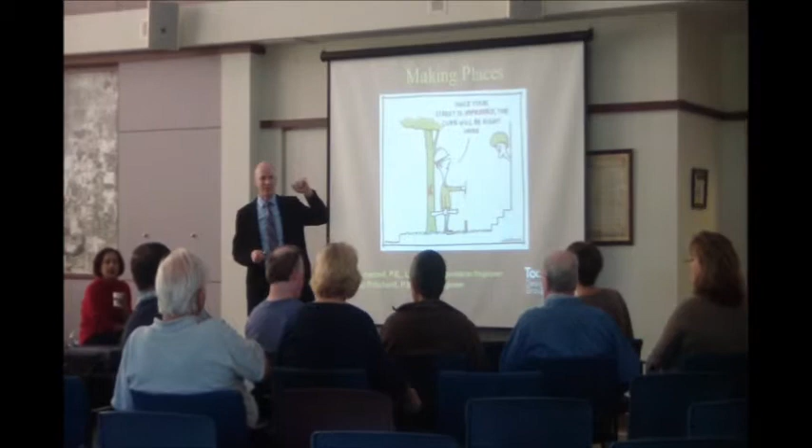I guess everyone can see better today, right? Okay, well for those who haven't been here already... so a couple of folks are new. Who's new? Who's been part of the process?

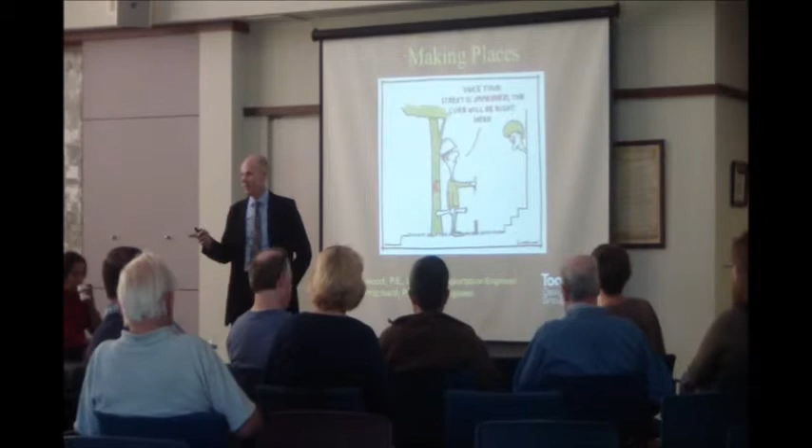Okay, so it might be a couple of people. I'm Ian Lockwood with Toole Design Group, and Anna and I have been working over the last couple of days on your area, and today we're going to share with you what we came up with. But I want to start by thanking Andy and Candace for setting this up and making us comfortable and challenging us to meet with folks and listen.

And for all of you who have come out to all the meetings, thank you very much. It's really hard to draw anything unless you know what people are thinking, what their values are, and what's concerning them. So I hope that we've captured some of what you told us in these drawings.

Just keep in mind that these are just ideas to start with, based on urban design principles. We are not familiar with the codes and the rules and all the other things that need to be taken into account. We're also not familiar with where all the property lines are, so we may be stepping on the odd toe here and there. That was unintentional. But what I'm hoping is just to share with you some vocabulary and approach so that you can take these ideas and keep moving forwards with them.

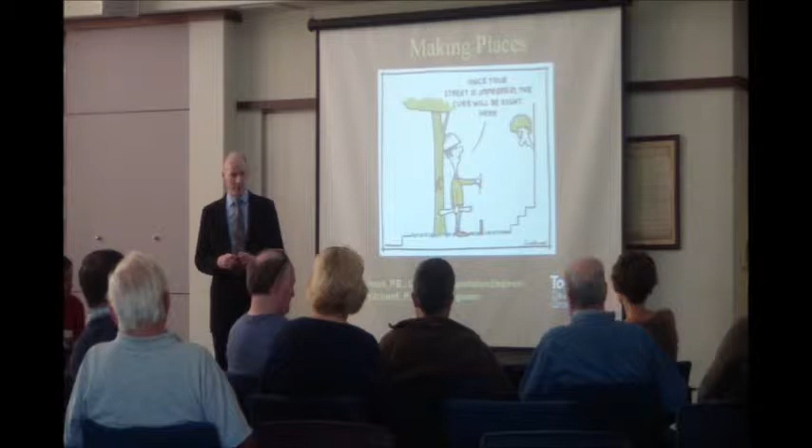When we got here, there was a lot of conflict and distrust and so on, and I hope this is a kind of healing process a little bit, where if we can get behind some ideas together, we can actually get something done. I can't remember how many times we talked about it over the last few days, about helping shape the planning, because then you get your vision reflected in the future, as opposed to not getting involved, where things happen and you need to keep having to fight what's going on.

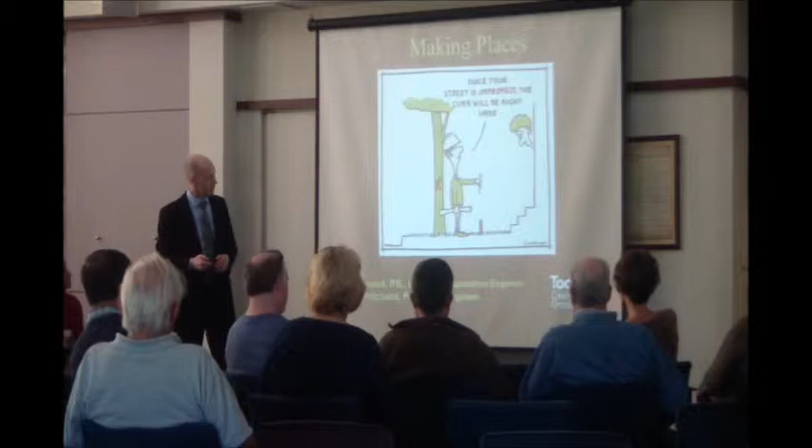So it's always nice to support rather than to react to something. And the other thing, when we met, a whole bunch of issues came up, and I explained some of the theories to a few of you. So we kept a record of all of those discussions, and we took the key ones and we're going to summarize them as well.

So it's a bit of stuff at the beginning, so that when we get to the ideas about the actual context, it makes sense.

Oh, this is the process. So we had a tour. We looked at your streets, some of your neighborhoods. We visited your roundabout. Awful lot of signs — just noticed that now.

Yeah, that's right. There's people who want to walk, or we saw some cyclists. There's plenty of development coming, so there's a lot of pressure on the area, so now it's a good time to get ahead of that.

We had lots and lots of meetings. There was no shortage of input, and we went late into the night talking to people. So we rolled out the trace paper, we drew stuff, and finally someone had to make a decision. So whatever the baby drew on, that's what we chose.

So basically, it's what we heard. Folks are very concerned about adjacencies — that is, what's compatible with their homes and so forth. The scale — they're most concerned about the scale. Green space is very important to folks. A lot of people said we want places to walk, we enjoy walking, we want to be able to walk. So we're going to talk a little bit about walkability.

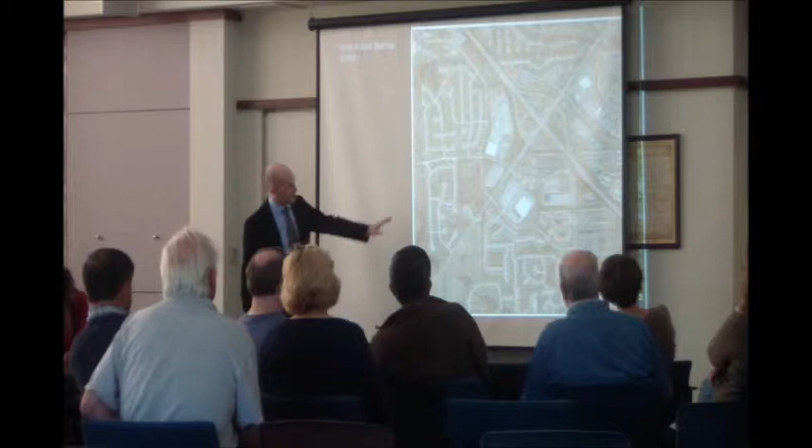Another set of first generation development with a few greenfields still left to fill in. So again, a very sparse network, and we're going to focus a lot on this particular network because it's probably the more challenging of the two.

And just for scale, since we talked about connectivity, we tried to pick a place you might be familiar with. This is Plymouth, and it shows the connected network, so you can contrast it with here - of course completely different context, but it shows you what a connected network looks like compared to a sparse network.

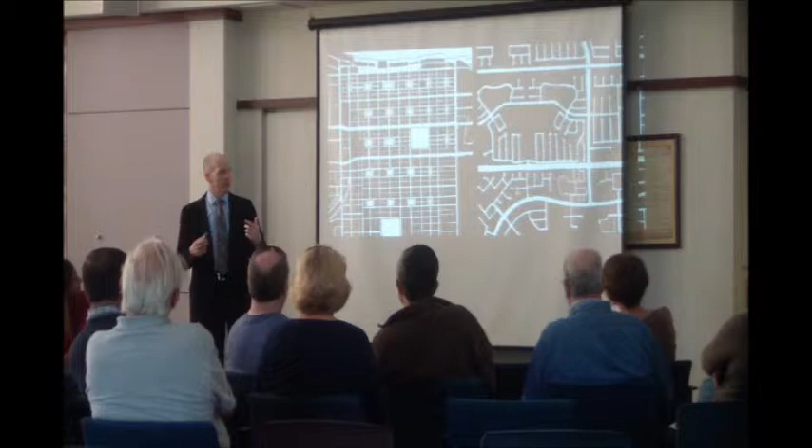Even the one on the left - those white squares and rectangles are parks, correct? Yeah, these are squares and parks, so you're always within a fairly close proximity of a park or a place to meet. That's something you expressed, and you'll see this reflected in what we drew. This is Savannah - it's very famous for its squares.

And then we talked about the scale of streets, having many streets do the lifting as opposed to putting all the load on just a couple of streets. It's a lot easier to cross several little streets than one big street, which creates a barrier.

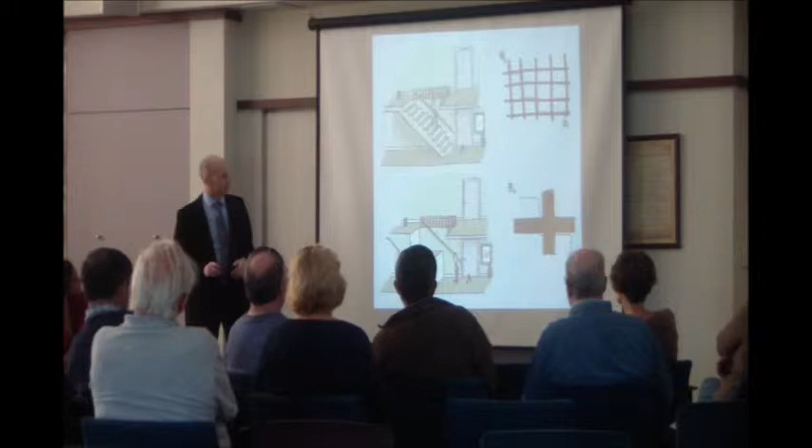We also talked about how street networks inform land uses, the scale of land uses. When the blocks are huge, you tend to get big block, big scale type development, and as they get smaller, you get more human scale development, which is, I think, in keeping with your vision for the future.

As you assign trips to the network, when all the trips have to use one road, it tends to default to be automobile oriented. With more routing options, you can go multiple ways, spreading the loads out. These networks also tend to be conducive to walking, so you actually have some choices - if something's within walking distance, you can walk there.

This is a little rule of thumb a number of us talked about: having like facing like. Single-family homes should face single-family homes across the street, townhomes should face townhomes, and retail should face retail. It makes a nice street when things match on both sides. The exception is open space - anything can face a square or a park.

We always like to have a street between the private uses and the public open space because it keeps it public. There's sometimes an issue with a one-sided retail street - retail streets tend to do well with both sides. But basically any land use can face open space.

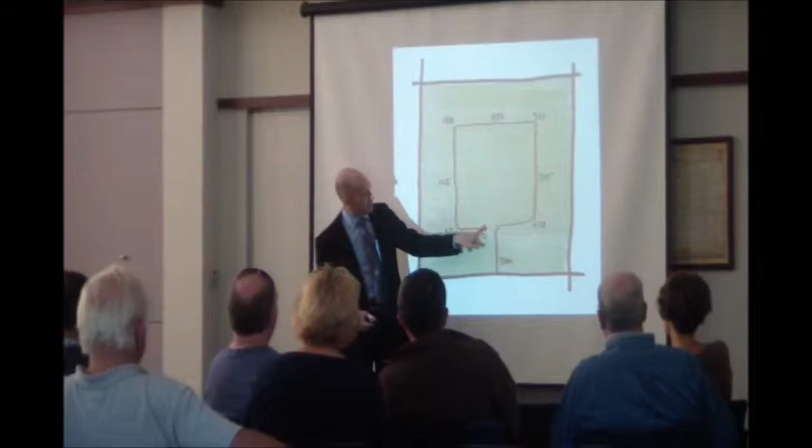So what would happen if we just connected the cul-de-sac to this entrance here? Well, now there's like a kind of continental divide, so the traffic splits that way. The average has gone from 250 trips on that street to 125 - the actual traffic volumes have been cut in half because of this connection. Now, if we made another connection, traffic volumes are a quarter of what they were. Same number of trips, same number of houses, but a quarter of the traffic.

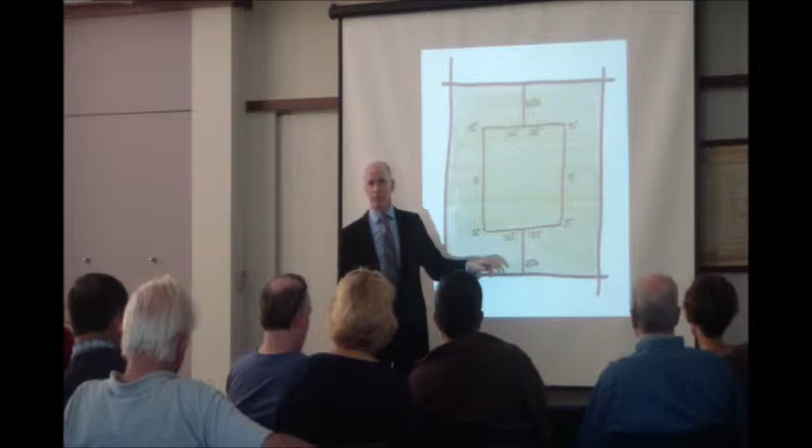So if you have a kid and your child wants to visit their friend, you're much more likely to let them walk with a quarter of the traffic than before. It's a much more friendly environment for walking. And if you connect it again, now you have 1/8 of the traffic, and eventually you get down to a network where there's not a lot of traffic because it's all being shared by all these streets. There's still 500 trips and still 500 homes, but the sharing of the loads makes it very walkable. So it's no coincidence that some of the most walkable places in the United States have the most little streets.

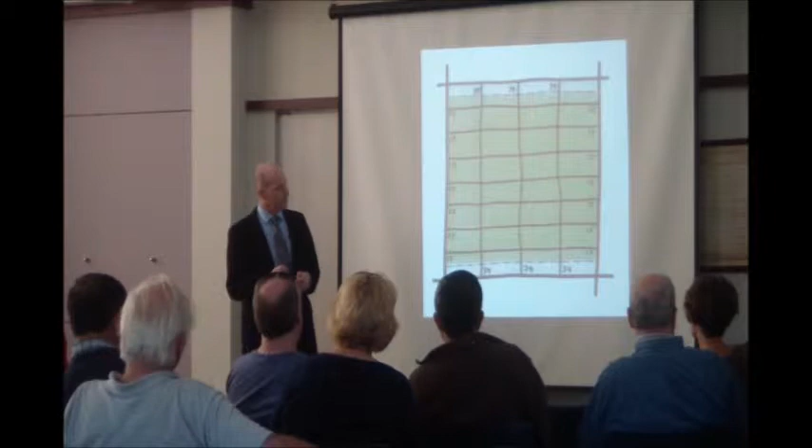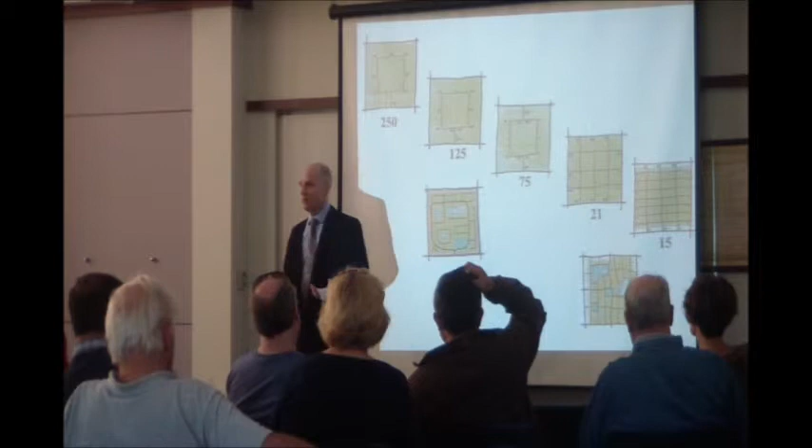But nobody actually builds it like this. There's kind of hybrids. Your place is unique and it's got constraints and so forth. We strive for connectivity, but we have to respect the context we're given. So that's kind of the motivation.

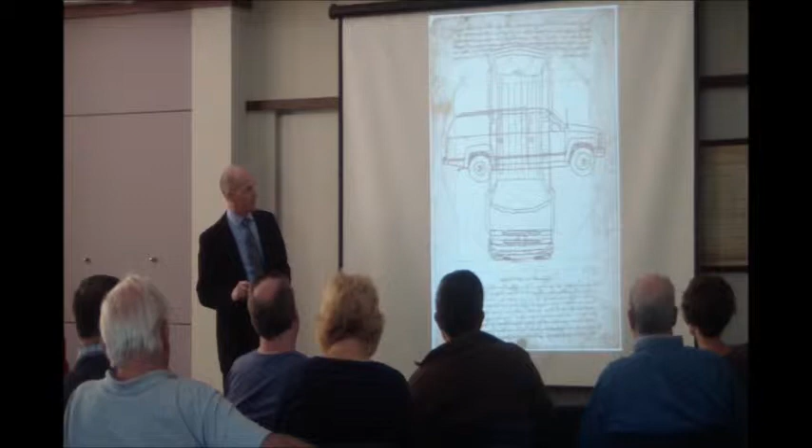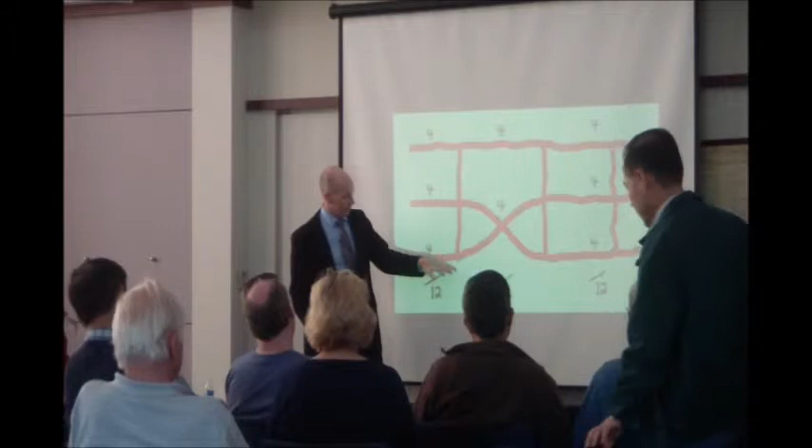And all the streets are four lanes, and the city thought they had 12 lanes east-west. But here is a traffic signal, and only one of the streets can have a green light at a time. So effectively, they only really have 8 lanes. And of course, there's all kinds of traffic problems here.

We were called in to referee which of the two streets had to be widened to alleviate the traffic problems. Everyone on this street wanted this street widened, and everyone on that street wanted that street widened. And they've been fighting for like 15 years.

There was a mall here with a parking lot and a couple of businesses with some parking at the back. So within half an hour, we just suggested, well, why don't you connect through there? And now you've got your 12 lanes, and you could feel the air leave the room. Like, we've been fighting for 15 years, we could have just done that. There's lots of ways to get back and forth between the two streets. They didn't have to crisscross here.

The property had to be bought, but compared to buying all the property to make an 8-lane road—all the backyards, all the businesses, all the parking—it was a bargain. So from a property acquisition perspective, we're really far ahead. The thing is, they didn't need 12 lanes, so we put the parking back on, and it's only 10 lanes. So the cool part is that the car carrying capacity went from 8 to 10, a 25% increase, and we narrowed 2 out of the 3 streets.

So when you find a confluence, if you can remove it, you get a lot more bang for your buck, because confluences force you to build roads that are way too wide, unnecessarily wide, just because you make all the traffic meet at these intersections when they don't have to. So these come in all kinds of disguises.

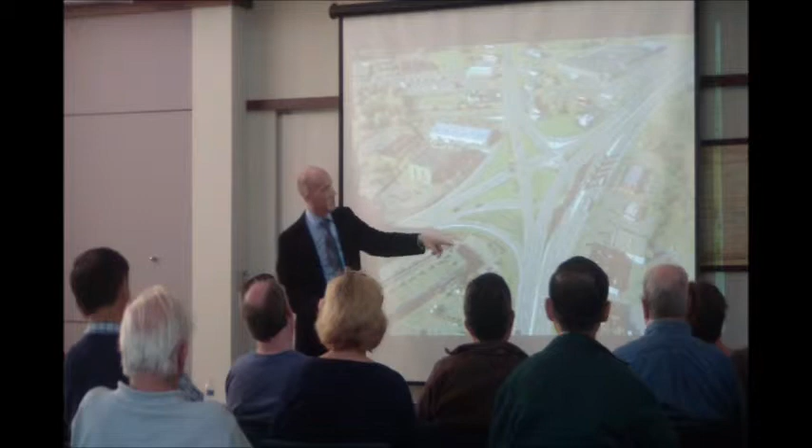Another engineering firm took a look at it, and they were going to build this big flyover. This is what we call solving in place. If you don't address the confluences, you have to handle all this traffic in the one spot, but when it gets to be too much, you have to create separate lanes, or widen, or something else. So this was going to damage half the economy of the town.

So with our solution of using a network, we can actually turn this into a contributing place and a square. And so that became the plan. It also saved millions and millions and millions of dollars that they didn't have to spend on flyovers and so forth—those are very expensive to build. It saved a ton of taxpayer money, actually benefited the town's businesses, still handled the car loads, and created a walkable place. So there's just no downside for this particular community.

And it even worked better for the cars, because this had to be signalized here—this even processed the cars better than the flyover.

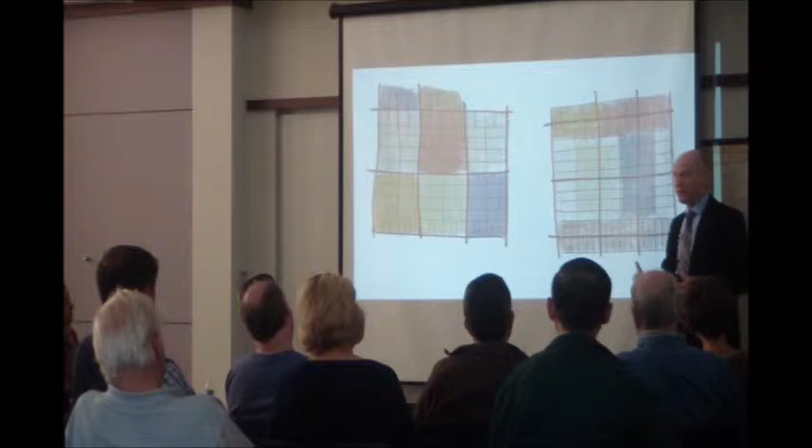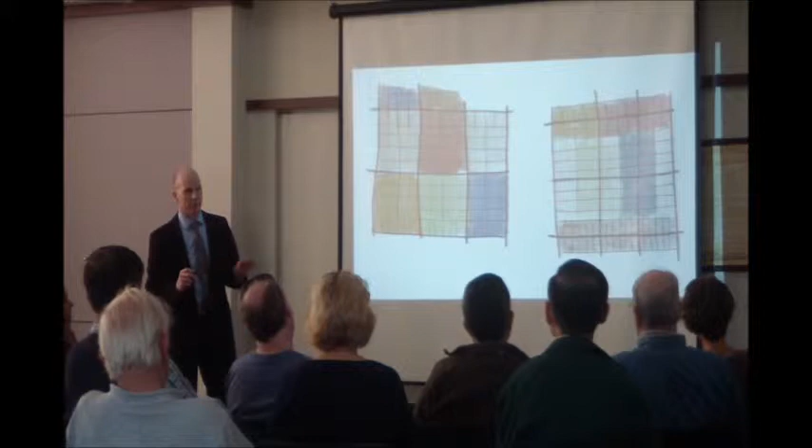Just a little bit—I'm not a planner, but just about the way you think about your land use. Sometimes zoning is done and the streets are at the edges of the zoning, so this zoning is different than that zoning. That's fine, but when you start thinking about your town center, think about what happens on both sides of the streets. Remember we talked about like facing like? So think about how you handle your land use so things are compatible across the street—these things can be incompatible. Just think about that a little bit. I'm no expert on zoning, but that's the kind of thing you want in your town center.

This is a very important concept for suburban areas that are getting infill, and that's exactly what you have going on. So this is an arbitrary street network, and you see these reddish lines—those are what we call A frontages. So that's an A frontage street, and every second street is one of these A streets, and every other street is a B street.

What we try to do is organize the buildings—and since you're already doing form-based code, this is already in your toolbox—is organize the fronts on the A streets so the doors and windows face there, creating a network of highly walkable streets where walking along is an engaging experience with the buildings.

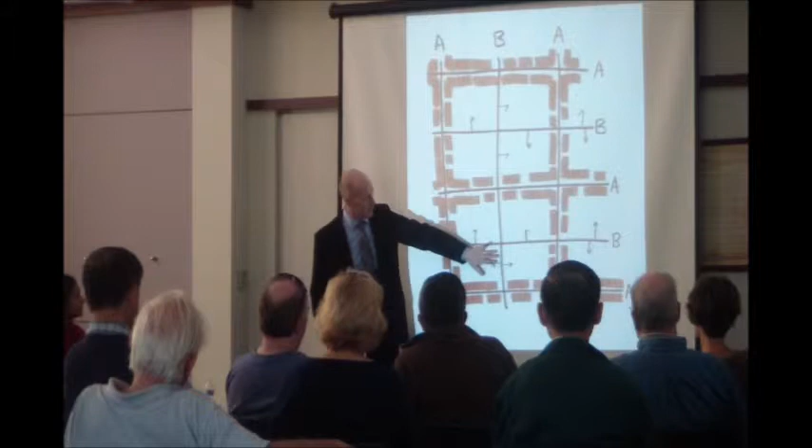All the servicing and parking come off the B streets. That doesn't mean there are no buildings on B streets, it just means your walk will be interrupted by driveways and so forth. So over time, as your town center fills in, if it's organized, it becomes increasingly walkable with every new building that goes in.

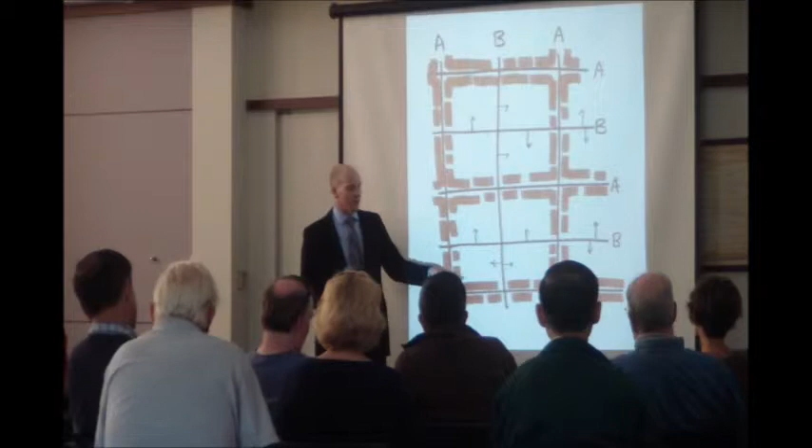If you don't do something like this, someone will build a building and their neighbor will build something backwards, so you'll be walking along the street passing a dumpster in a parking lot, then another building. This system gives predictability, so people can invest in your community and build a nice building knowing their neighbor will build a nice building with the front door in the right place.

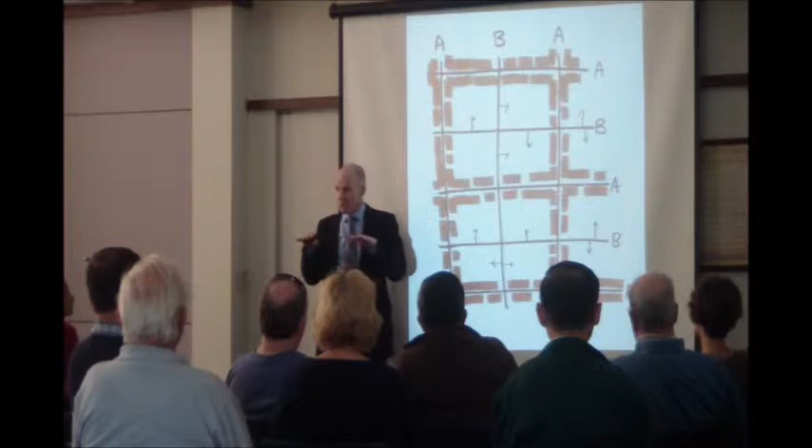So it's usually a good idea to organize your developing area along these A and B lines. There's just no money to line every block with A frontage, even in a dense downtown city, but particularly not in a lower density town center like you'd envision here.

So just a quick recap on walkability. There are three ingredients every walkable environment needs, whether it's a park or a city. People have to be comfortable walking, feeling at ease with their environment—this talks about scale, natural surveillance, feeling like you're not alone, that kind of thing.

Engaging—does it sustain your interest as you walk? We heard from a lot of people that they want to walk more, and if we can make the place engaging through A and B streets and that kind of thing, you'll be able to walk further and enjoy it more. Accessible—can you actually physically use it? This applies to anything, whether it's a park, a downtown, or a village.

But in centers, there are two more things needed. You want a convenient environment with a mix of land uses, so there are things you can actually walk to. If there's nothing to go to, you're not going to walk—so you want parks, groceries, a theater, or whatever might be in your town center.

And then connected—this is what we're spending a lot of time on—the street network, how does it all connect together? So with those five ingredients, you can actually get a very highly walkable place. The magic is how you apply those to your context. So let's get into that.

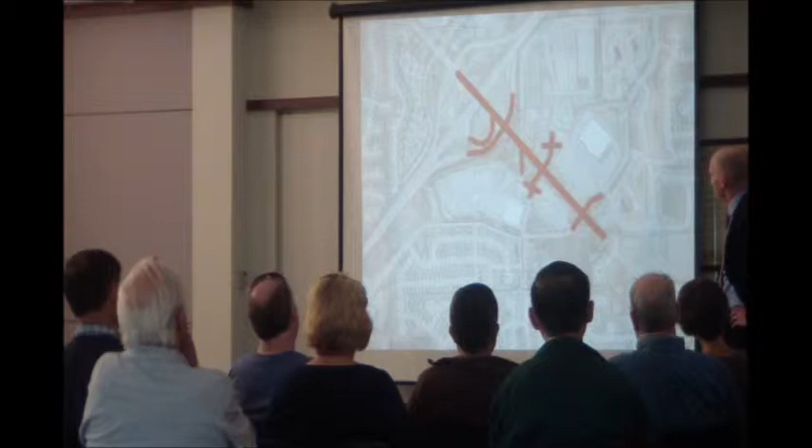Now, I haven't actually seen this presentation yet because we just put it together, so I'm hoping the next slide is of this area. Pretend for a second—this is one of those crisscrosses. That one has development on all sides; this one doesn't, so we have a little more flexibility here.

So let's pretend you could take a pair of scissors, cut those two streets, and pull them apart so they're not crisscrossing—so that if you're coming down this street you use one of the streets, and maybe if you're coming up here you use the other one. So you have two intersections processing what now one processes, making it a lot easier to get around.

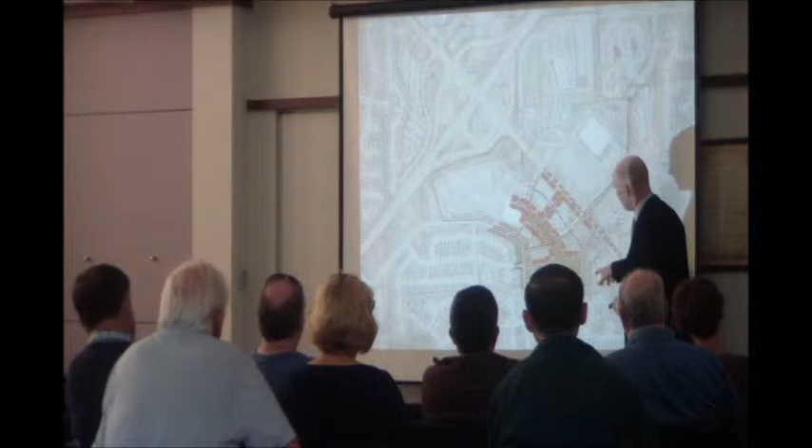Oh good, so there it is—so that undoes one confluence. Now there's a whole lot going on in this drawing. Let's start with the south, because this is what a lot of the energy in the room was about the last couple of days—the adjacency with these homes.

So what we have here is a liner of similarly scaled homes, about the same height. Just put street names on a few of the streets. They're narrower, so we can get more homes in, and in this idea they're 2 stories, denser, but a little further back, so the backyard's a little bigger.

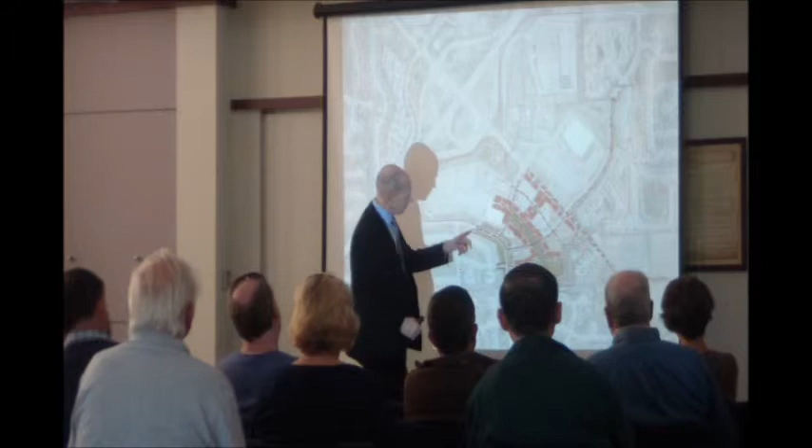That creates a nice buffer to everything around it. On this side, the characteristic of this area is there's a set of berms that come down, and then there's a wetland kind of thing. There's a stream, so we thought we'd look at the stream, and it goes up like that, creating a little linear park with a large park at the bottom.

Whenever you have a park, we consider that an A space, and we always like to frame it with buildings. So we frame the north or east side of the park with these buildings, and then along up towards the target. These are what we call A streets.

And then this would be a B street, so if you had to access parking, that's where you access it from. We made a little connection to the neighborhood where the wetland goes through. You can walk up into the park, then go up one of these B streets, and you're not walking past parking lots. You can get up to the target.

There's already an effort to create a connection between the grocery store and over here, so that in our minds made a good place for another A street. You can imagine buildings lining here over time, and this is already happening - there's buildings starting to frame the arterial right here.

And then, for your house right here, we didn't monkey with your house, but we put in this little small driveway so you can connect and turn left.

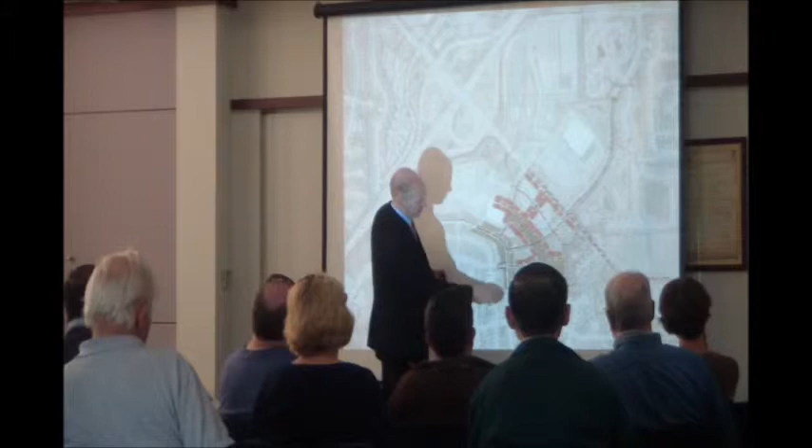The other thing that's here is down on, I think it's called Maple. It goes someplace and there's a big right of way, so we're thinking of some kind of trail, some sort of bike trail that could come up, go along the berm up here, which actually goes someplace, and it could come into the park system, and perhaps down here too, serving the neighborhood. So you have a connected bike system that connects the region to your neighborhoods and to your center.

So that might be a layer of convenience you could provide for cycling. These sorts of facilities are appealing to a pretty good population of cyclists. Most cyclists in the United States have to be survivors, since someone could be on the street, but this is actually comfortable for kids and so on, going to school or ice cream stores or what have you.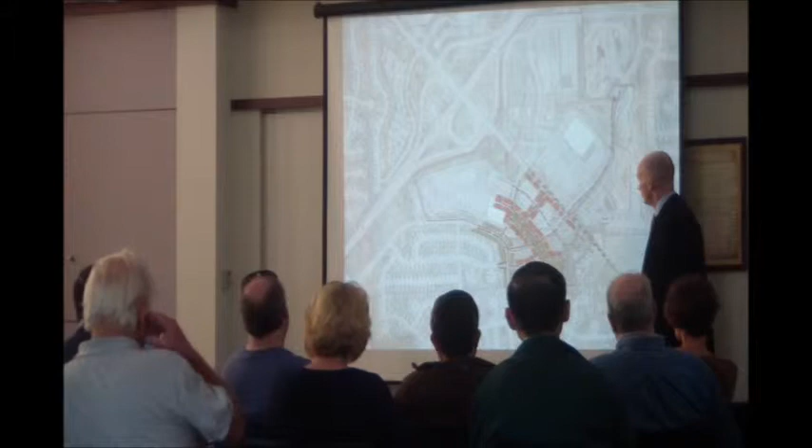So can I ask a question? Because I understood that in order to have a road off of the NRC road from the road commission, it would have to cut through my property. Are you saying that one property doesn't need to go over? Yeah, they're probably talking about if you wanted a signal or a left turn, if we're right in, right out kind of thing.

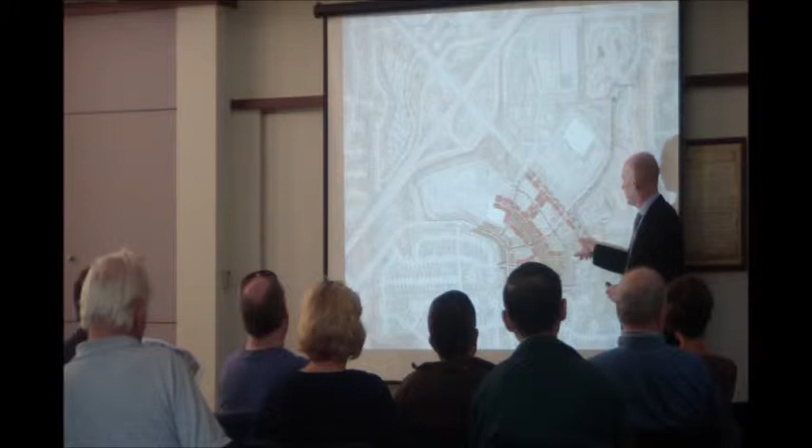It's just like your driveway, but it gives you access to this one. I don't know if you have $500,000 to spend on a traffic signal, but this kind of thing I think makes more sense for this context to provide access to a signal.

Right, I was just focused on the corner - yeah, there isn't, if you wanted a big intersection. But you're saying it's a small road, a driveway, that would be fine.

Yeah, they're right about that, and we'll get into it, but you can see that where the signals are going, there's a regular spacing, and to get that same spacing would be right here in your property. So if we wanted to go with the corner, would there just be another red box on the other side of the road? Yeah, you would just extend it.

This sketch will be posted on the township website, is that correct? The presentation will be, and will you give us a copy of this? Yeah, we'll give you all the JPEGs, all the files, and the PowerPoint, so you'll have access to all of them. So it'll be both posted independently as well as part of the presentation.

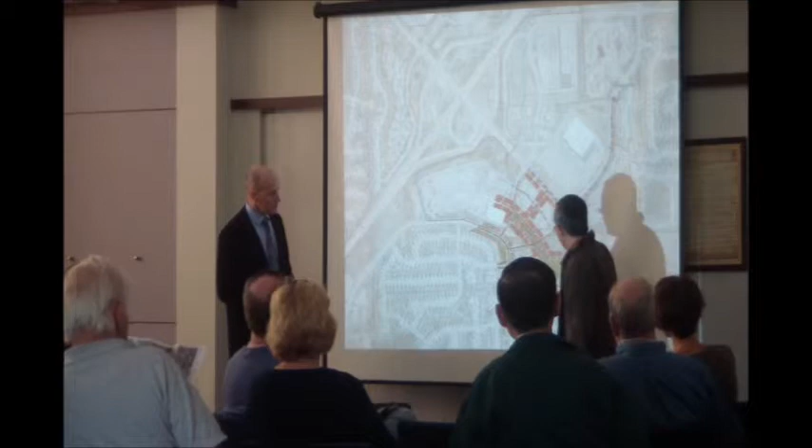How does the water flow? Because if you put property up, the water actually flows. This is the wetland, the water actually flows this way. Yeah.

I tried to get the alignment based on the aerial. I might have got it off, but you could pretend this is over further. This is just a concept. In fact, I probably made lots of mistakes like that. But we did the best we could in a short time with aerials, and we didn't have time to go out and actually survey where the water went. But wherever it does go, you either move this, or alter the flow, or some combination.

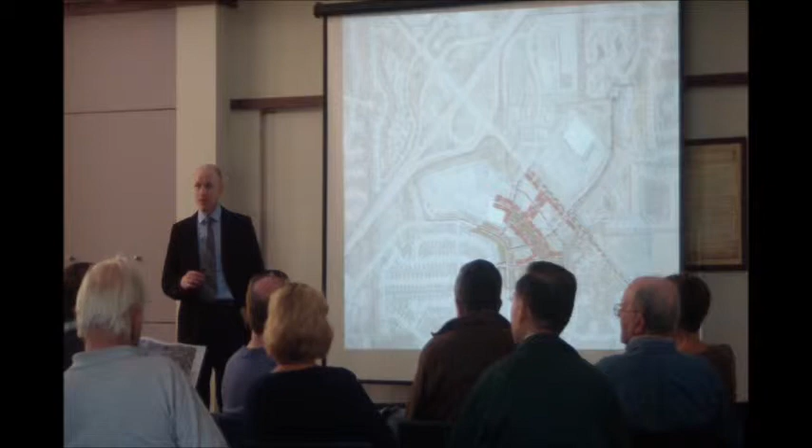Okay, let me just- let's finish the presentation, I appreciate the concept, and let's finish, because I know you have more.

I probably, if I were developing this, I wouldn't duplicate your homes, but I would duplicate them in height. But I think to make it pencil out financially, there might be more homes, not more in size. Yeah, there'll be skinnier, maybe a little deeper. But it would be low cost houses or about...

Yeah, I'm not the market guy. Anybody's gonna move in here though, I don't think, I think this property's probably too expensive for a lot of low cost houses. It might be, and the densities will probably go up as you move away from the community. And there's probably places, if you're going to mix in some affordable units, that's probably where you would do it.

The red rectangles are all businesses? The red means that's just where you want to front with buildings. So I don't know what the buildings would look like or how tall or what have you. I just wanted to use that to indicate the A streets.

And so is my property being used as a buffer between Heritage Falls and commercial? No, I just didn't want to presume anything on your property. But you could do it red in here and then parking come in here if you want. But we buffered you from this in case you wanted to stay residential.

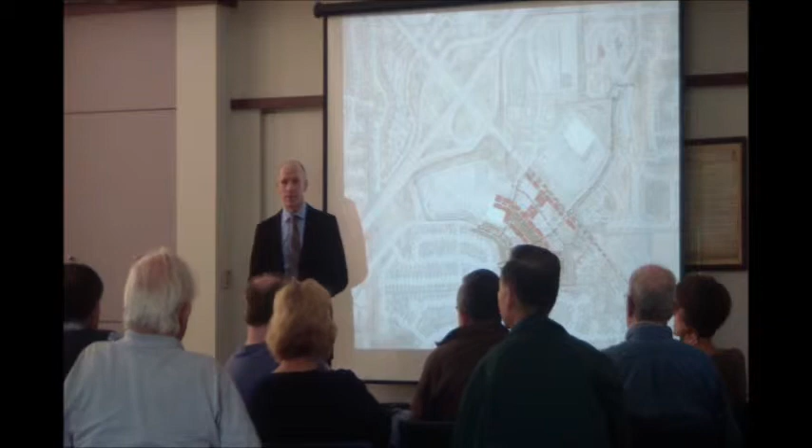Yeah, let's do that. But I think we're on the right track according to the mood of the group here. We can get into the nitty gritty after if you like.

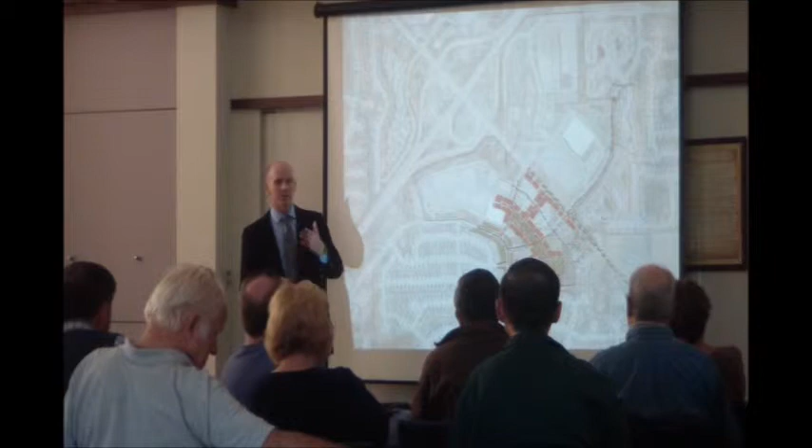So we tried to extend the same sort of thinking further along. You see that there's the same buffer here. This is already fronted by businesses, so that makes sense to have it at the A Street. This is the connection proposed to this new development. Right now, when it first gets built, this driveway lets folks go around to get to the interchange. If this end unit were to redevelop, we'd suggest connecting these two streets for all the reasons we went through earlier about connections. Again, that's the A Street.

This is the B Street - all these houses back here, and the businesses are back here, lined with a berm buffer. What we were trying to do is create some bookends, if you will, and create some open space where you can eat and do the things you wanted to do. So we proposed a square here.

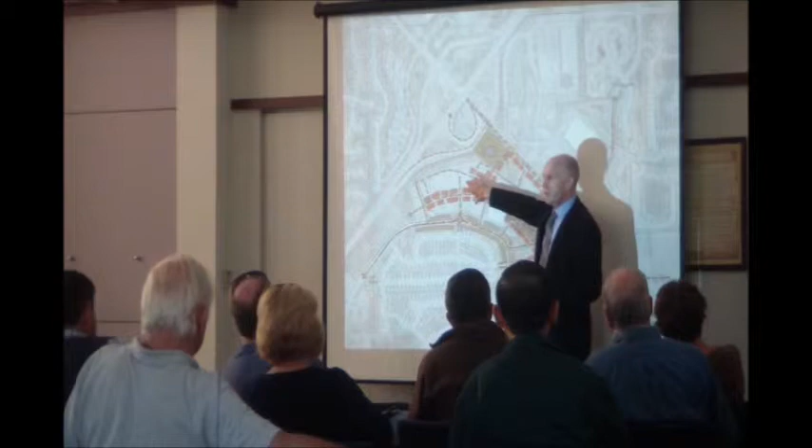It's probably a good idea not to have every park exactly the same, so different functions can have different places. This would probably be a little more intense than down here, more of a hardscape where you'd have public events and concerts - things you probably wouldn't want so close to the housing. So that's kind of a square, and like a park, it has a frontage around it.

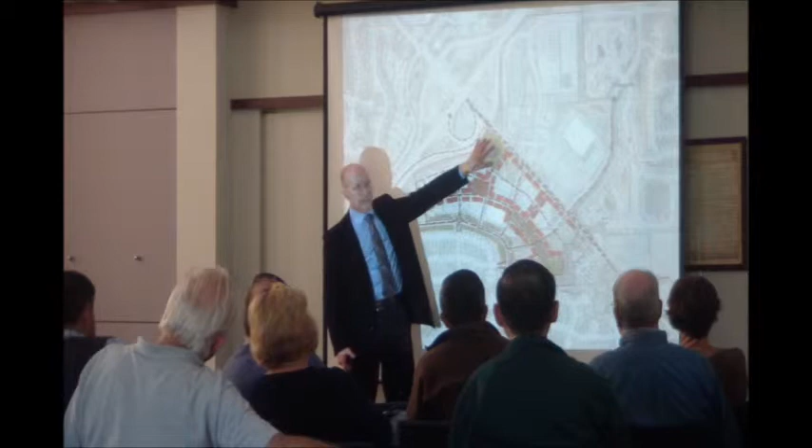This is actually a fairly nice looking wetland and pond. We were trying to use that as a nice address for the A Street, to engage that street and create some views to look into it. Right now it's kind of hidden, which is a shame - it could be quite a nice feature as you come across it.

So that's kind of the idea. A lot of this would have to happen as things redevelop, obviously, but some of it can happen now. Things like this will probably happen early - this is right now a greenfield, so that could happen sooner. Some of the other parts would happen later with redevelopment. But planning is all about thinking about the whole thing now, so when things change, you have a plan to go to.

And down here, there's a very legitimate concern that folks are going to use this street to commute on - people do it already, we've had lots of people tell us they did. So what we're suggesting is some traffic calming on that street, with entry features at the end so that if people drive into the neighborhood, they know they're in a neighborhood. Then we have a few traffic calming measures.

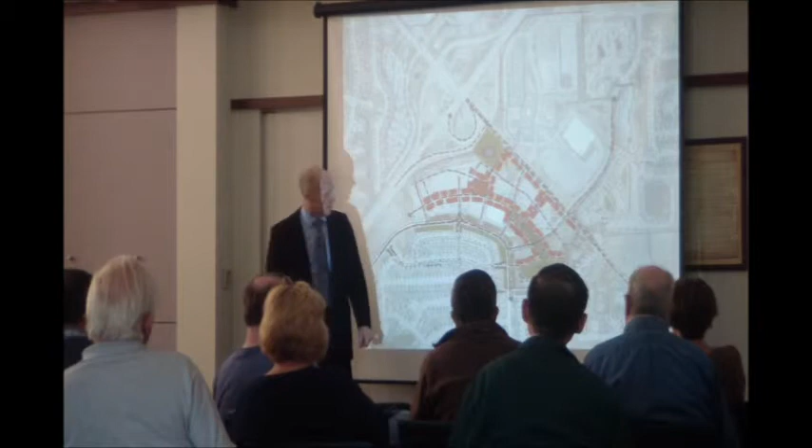These are far more effective than bumps, because you can go over a bump and your suspension will react. If you go too quickly over a speed hump, while the front of your car is going down, the back is going up, and it gets really uncomfortable if you speed over them. So they're highly effective, and there are all kinds of different ways of marking them.

We actually have speed humps in the neighborhood I live in, and we moved there recently. The first couple of times I drove over them, my husband got really mad at me because I was bouncing it around. We hadn't figured out what speed you could go, and then he was driving and he figured out that we really did need to slow down. Yeah, so it wasn't me, it was the hump.

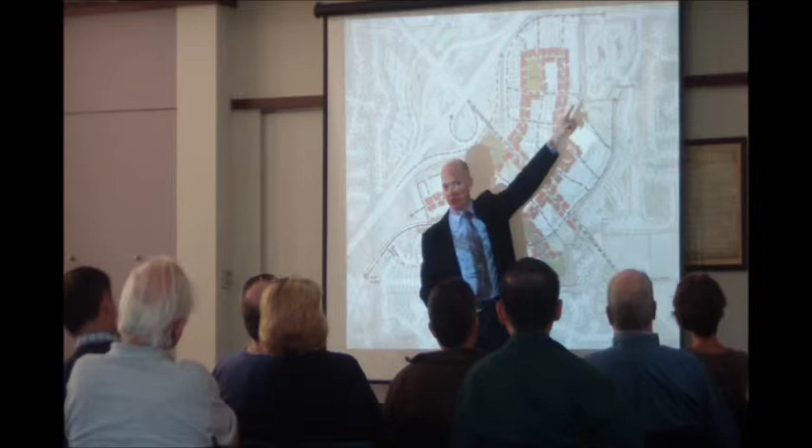There's two answers to the question. The first one I'll go into a little more depth in a moment. But right now, there's only two intersections processing all the traffic from both sides, and so everything basically is coming up here, creating a barrier effect. And with more connections, the idea is that some of this traffic won't have to use this street anymore. Because of the constraints up there, it's a bit difficult to untie that confluence.

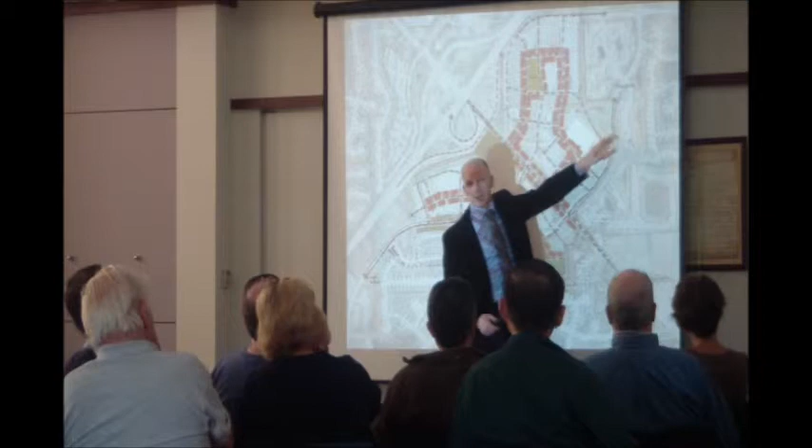However, this is a bike trail. We didn't think about connecting across here, but maybe you could. Unfortunately, it's on one side of the complex and one side of the street. But if we had more time, we would probably try and conceive of a bike plan later for this. We have a bit of one that I showed you earlier, but you might want to have some kind of bike facilities come up to the park, that kind of thing, and I don't know if that would give access to your swimming pool. It would start to create a more coherent network for cycling.

Now, with regard to putting humps and things on what we call framework streets, there's two types of streets from a traffic calming perspective. There's framework streets, like this one, like that one. These all have an emergency services role, like those were response routes. And then there's what we call non-framework streets, which just really provide access to homes and that kind of thing. For these sorts of streets, it's appropriate to use what we call retrofit measures, like humps, like mini circles, like chicanes. There's a whole family of traffic calming measures.

When you get to framework streets, you can't really use these because you need so many of them. It would drive you crazy. In fact, there's a kind of rule of thumb, no more than 8 to 12 in a row. And to get the spacing, you would probably need like 50 of them. And you'll end up having them removed, and that's been the practice. Furthermore, the fire department wouldn't let you do it anyway.

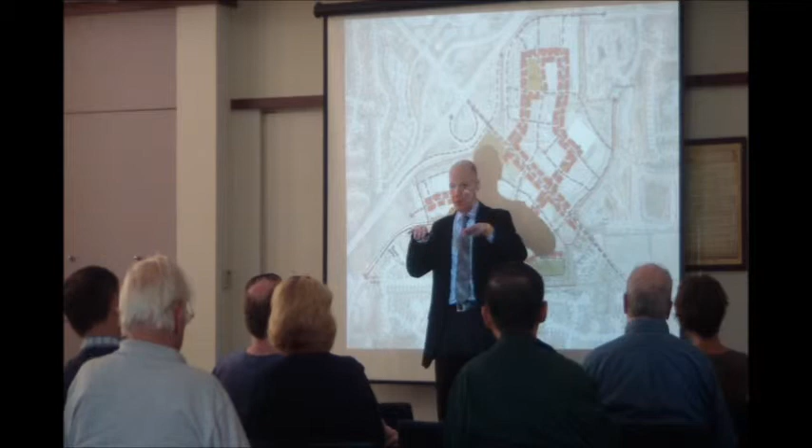So on framework streets, the way you slow traffic down is looking at lane width, number of lanes, the edge treatments, the sense of enclosure, the views. And this has been designed with the berms and stuff. It has like a highway vocabulary to it, it's very straight and fast. So if you wanted to self-enforce lower speeds through design, over time you have to alter that. Next time it gets paved or whatever, maybe revisit its design.

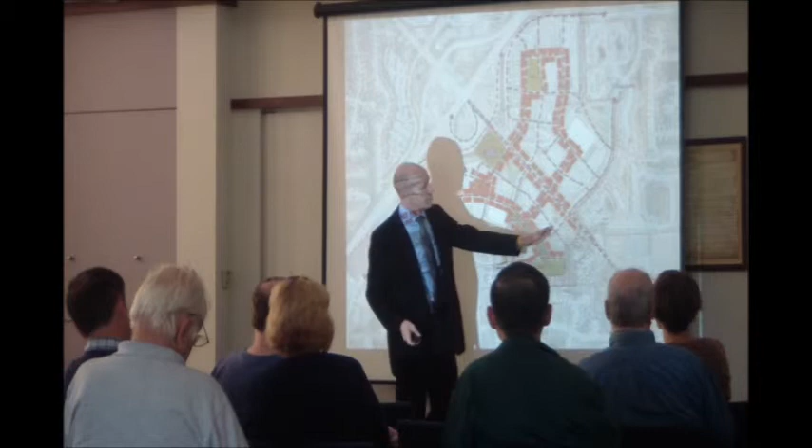So if you're interested in lower speeds, which tend to make a safer, more walkable environment, think about those cross-section changes, lane widths, edge treatments, sense of enclosure, views. And if it doesn't change much, then you're limited to trying to cross to other parallel facilities like we're proposing with the bike trail. So you might change some intersections so you can actually cross the street.

Yeah, but it still doesn't get us from one side. No, it doesn't.

Yeah, when you say light, you mean traffic signal, I think. Yeah, traffic signals have a set of criteria that have to be met before they're put in. So you have to meet those criteria, and if you do, then you can get a traffic signal. There's different types of walk signals too that you could look at, that the county could look at. So if you explore that and put it in the right spot.

So then, notice that there's a bit of peculiarity here, and another one in here. We want to, we're working in a few places around the country to relieve these sorts of confluences.

Town centers are about network. Highways are about not network. They're about denying access. So it's kind of like an oil and water kind of thing. And a lot of you expressed an issue that all the traffic has to use that, which is not really town center like.

In places where there are highways going near downtowns or village centers, we're exploring what we're calling proximate interchange ramps. That gives some relief to this intersection right here, which is everything has to go through that's associated with the highway. So on this side, it would look like this.

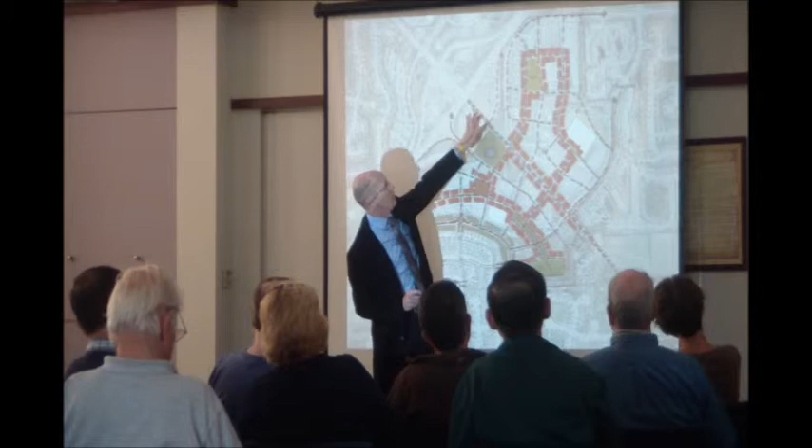And then on the other side, same sort of thing. The network is designed so that it can be simply retrofitted, so you can go to the big arterial and then get onto the highway. You can still do that, or you can get there from the town center. So it gives you choices, and it again spreads the load.

So right now we've got 2 ways to go east-west, and with this you'll have 5. And then right now you've got 1 way to get to the highway, and this way you have 3, depending where you're going. So again, it kind of spreads the load and lets each street be a little simpler design for walking and cycling.

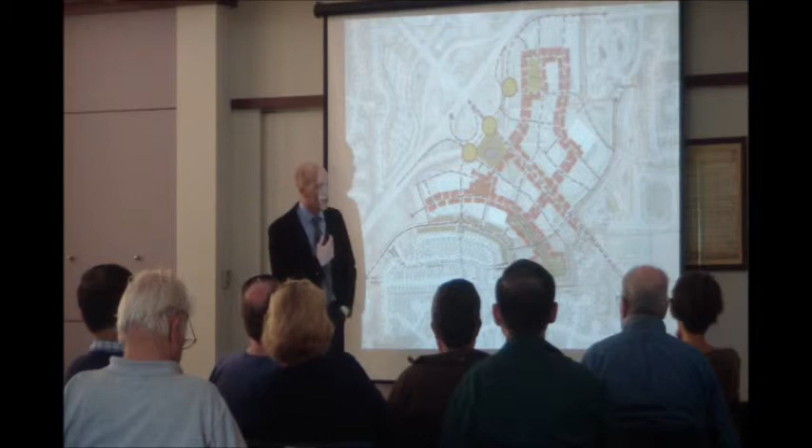That's a good question. So paying for something, good planning actually is more affordable than bad planning. If you continue with your current network, the solutions to traffic problems get incredibly expensive because they have to buy a ton of private property to widen these roads, all at public expense, all at taxpayers' expense. With a plan like this, as things redevelop, you add the network, and that cost is mostly borne by the private sector in terms of development. So if you're interested in affordability and reducing your tax burden, a connected network is more affordable than the sparse hierarchy. There are other costs too, like identity.

What is the value of identity if it develops like everywhere USA, where everything's on one road? And you've seen those places where it's all about the arterial and there's no community. So that kind of lowers the value and the quality of life of the whole area. So there's more cost to just the physical construction, which I think is cheaper with something like this. This is actually more valuable in lots of different ways. Crash rates will probably be less. The value of these homes and businesses would be higher. More people would probably want to visit these places and eat and shop, whatever they do, whatever happens. So it's pretty good, planning is usually very cost effective.

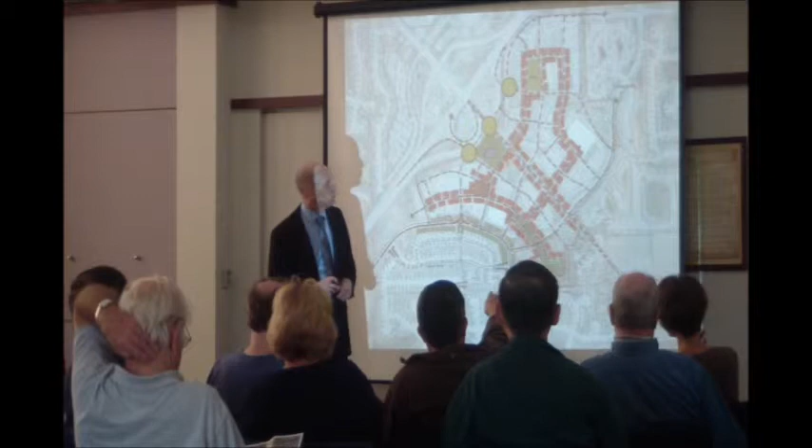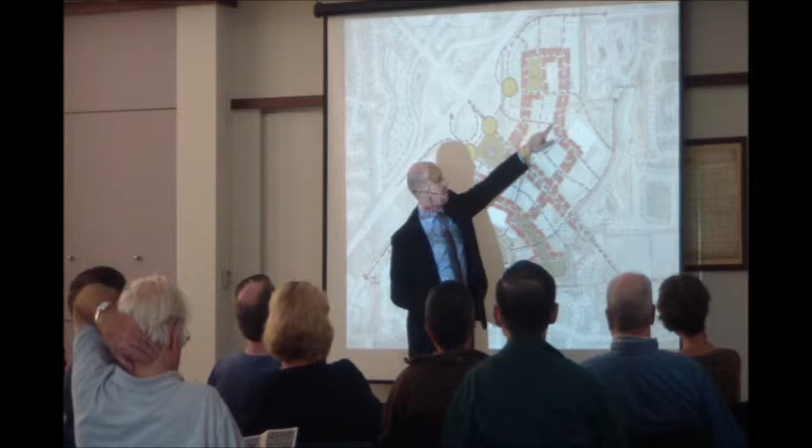That's a good question. So we designed the street network so that all the existing buildings can stay where they are. You notice that we avoided even these 4 out parcels. We had to rearrange their parking a little bit, but we didn't knock down the buildings.

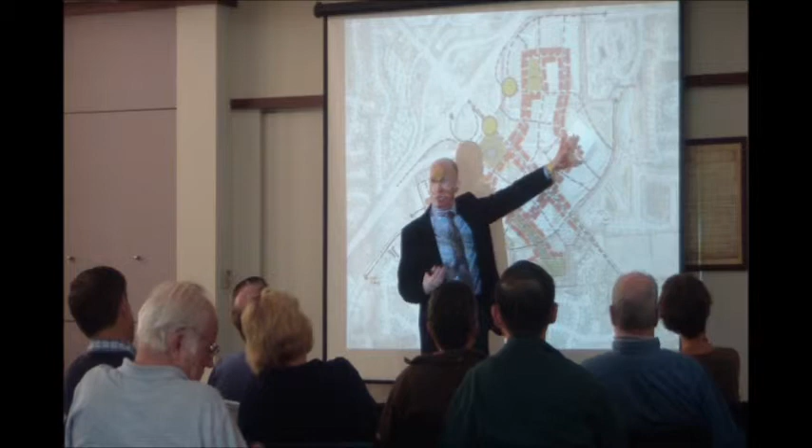This creates an address for the grocery store. Now, if your store were to change, you've already got the framework for whatever replaces it. They all stay the same. This just shows that that's the front of the stores. But if it were to change, then you know where the fronts should be.

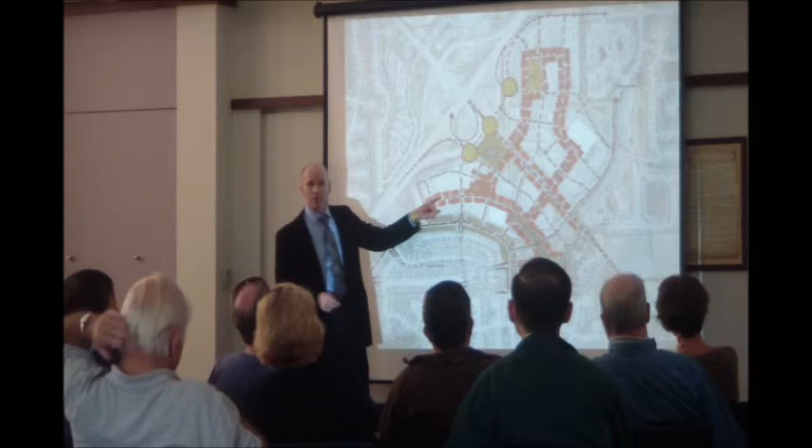So what we try to do, even here, there's a bit of an exception. This building would need to be replaced to make that connection. But we tried to minimize those as much as we could to work with the existing buildings.

I think he likes these sorts of concepts, but he hasn't seen this drawing because we did it at midnight last night. This actually has a lot of access to his property, and it achieves his goal of relieving this road more than his current idea, because right now this building's in the way. But if we think ahead a little bit, it's not a big leap to make this connection, and that's something the community can put in their plan.

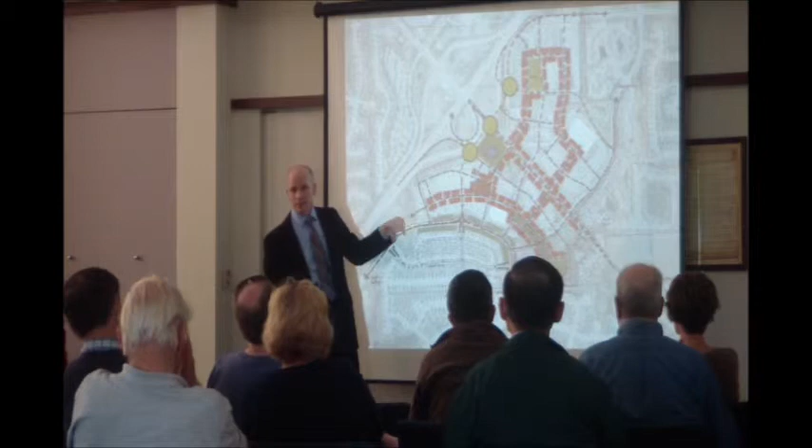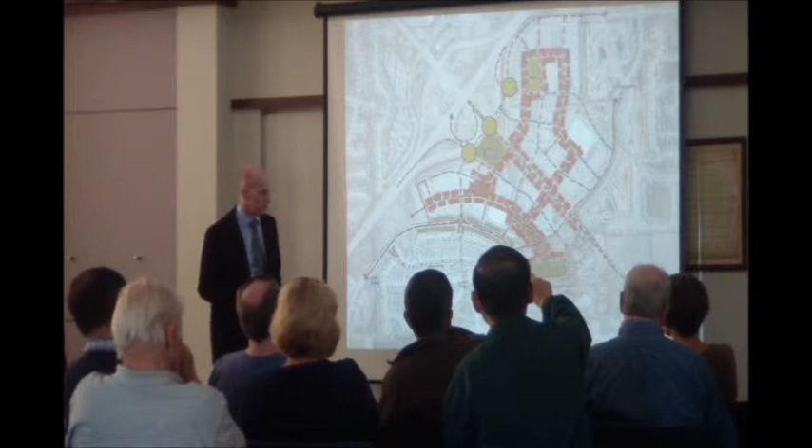So let's look at the other site. Can I have a question? Oh sure, maybe, sorry, I have a question. What percentage of the guarantee will happen? What is your? Actually, why don't we talk about that after?

Try and look, so these are ideas. At some point we want to memorialize this, codify it, and so on. There's a whole process, this is just the start of the discussion, and we don't even know if these are good ideas yet. We're just getting some feedback right now, so we're right at the start.

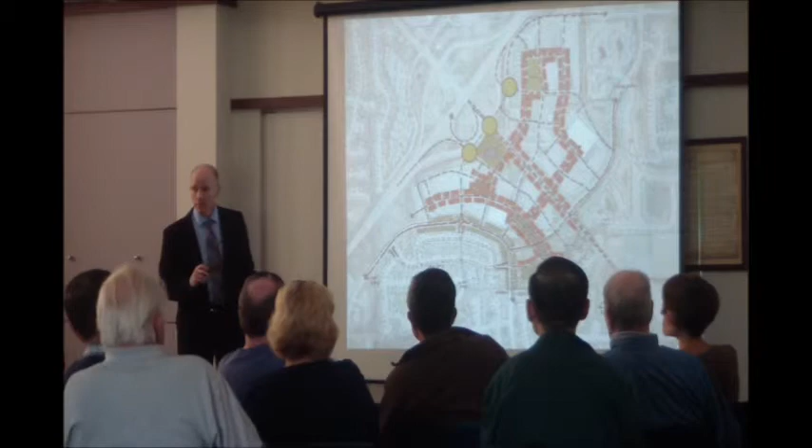Let them finish and then I'll close it out and I'll have a question. So let's talk about the other. I understand we only have like, what, two hours left?

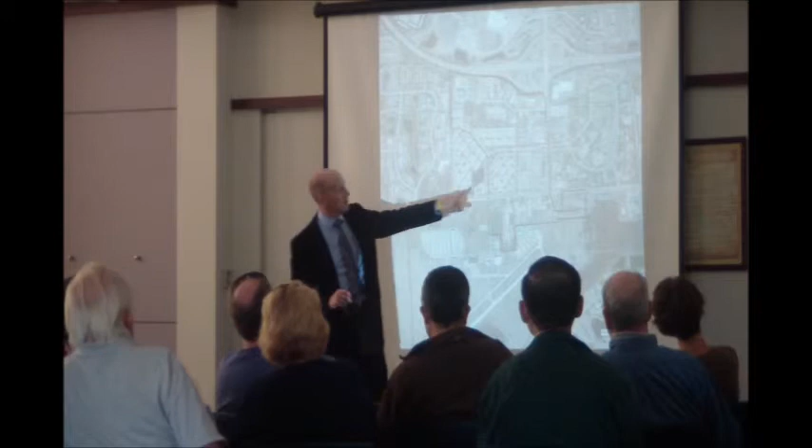You guys have. So north is up on this one. There's the airport, obviously. This has been redeveloped to a Costco, just to orient everybody. Does everyone know where we are? Okay, I'm not going to go through all the same stages I did for the previous one, because this is a lot more straightforward, since the block structure is a little more rectilinear.

There's not the same adjacencies that we had before, and the same level of concern about scale and so on. So we didn't want it to be as prescriptive here as we were in the previous study, because there's no one right answer here. There's lots of opportunities here, and what we did think was good is that there's a boulevard getting built.

Half of it's done already, and we thought it would be a pretty good idea to extend it to this kind of open space that's already existing. And if people wanted to extend this idea, it wouldn't be a stretch to think about it continuing all the way over the neighborhood so they could come in and use the space.

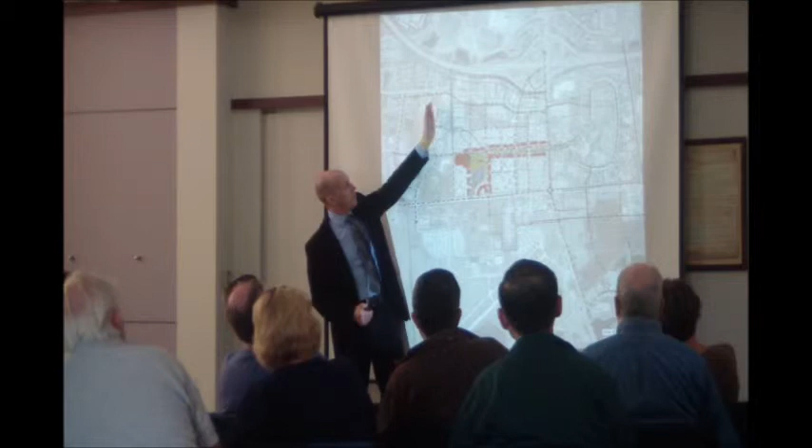East, west, north, south - like at the end of this cul-de-sac, this is begging to get extended to here. Right now, nothing crosses this line, so everything has to use this street and go to the roundabout. You have a classic confluence. So by connecting here and here, this State Street roundabout would really benefit.

And then similarly, we can connect over to - this has been here since the 60s - we connect over here. Again, we don't go through anyone's buildings, but we try to stick to property lines and parking lots to make these connections.

And then we have a big green field here, and if the pattern of development keeps going the way it has been, it's not going to be too long before something is here. So now's the time to start thinking about making some connections. I don't know if these are the right ones, but some north-south, maybe a couple of east-west connections would make a lot of sense.

Are you allowed to move there?

Yeah, you're allowed to build here. The issue with airports is the noise, safety, and heights. There are noise contours, and depending on how far away you are, you can do different things—storage, or golf courses near runways. So you can do stuff here, it just has another set of rules that apply. But you can certainly do stuff here and here, and you want to connect.